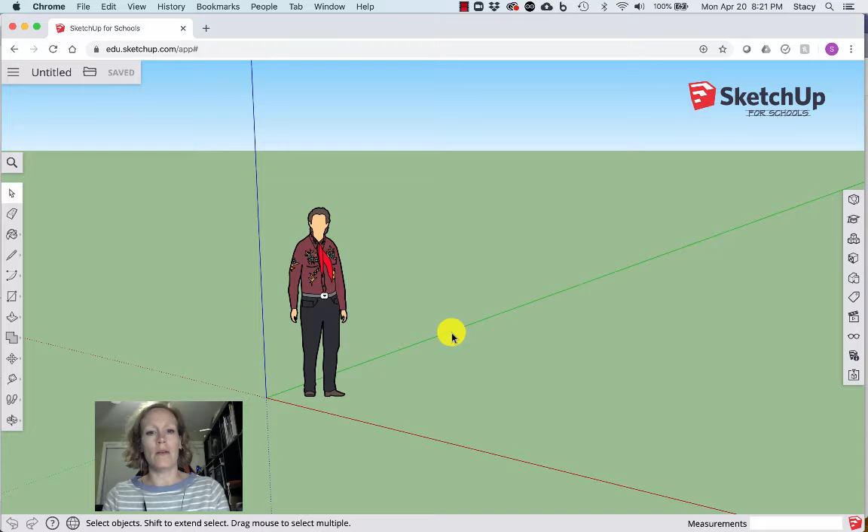She's over here just for scale, so you can see the scale of the things that you draw next to a person, but we're going to draw some things that are tiny, so I'm going to go ahead and select her and delete her. The next thing that I would like to do is save my work so that I don't lose things. So I'm actually going to name this model. We're going to call it example arm.

And it's going to ask me where on my Google Drive I want to save it. So I'm going to stick it in the SketchUp folder, and we'll put it in the tutorial, because that's what this is. Those are folders that I've already created. Unfortunately it will not let you create folders on your Google Drive, so you'll need to go into your Google Drive or your Microsoft OneDrive and create folders that you would like to house your SketchUp projects in, and then you can come back into SketchUp and save them. So now I have my arm saved. It tells me that right up there, and I'm ready to start drawing.

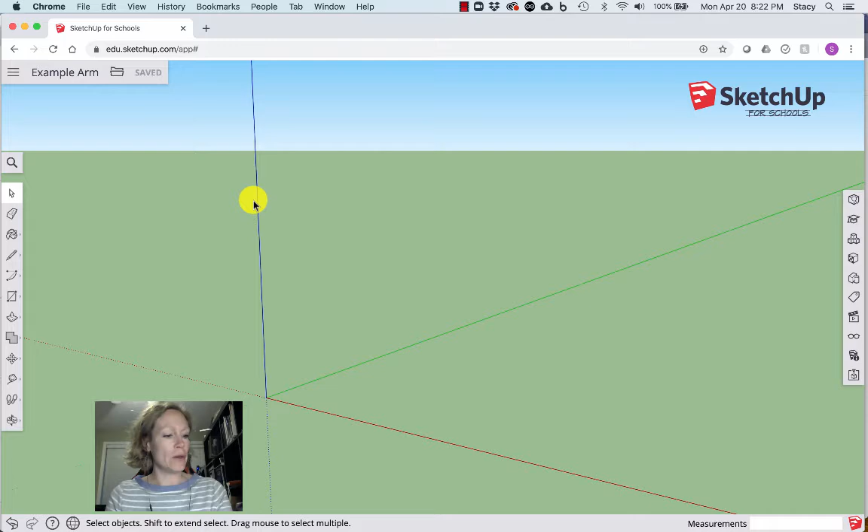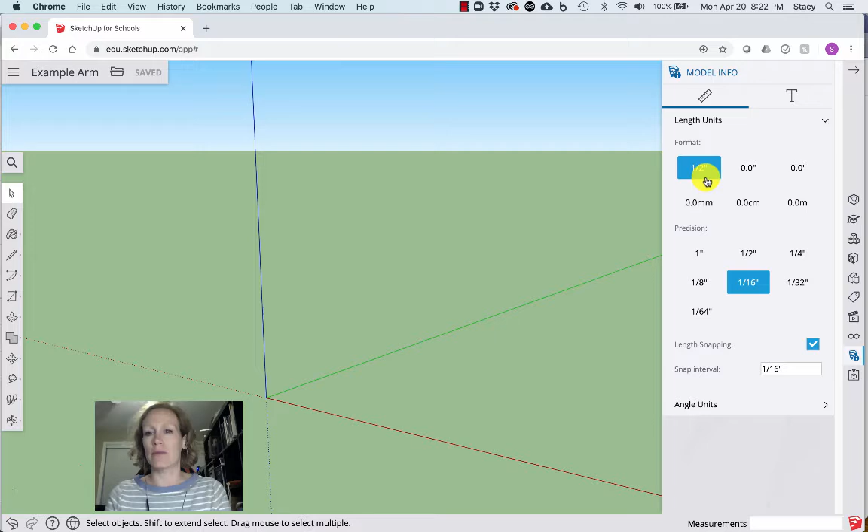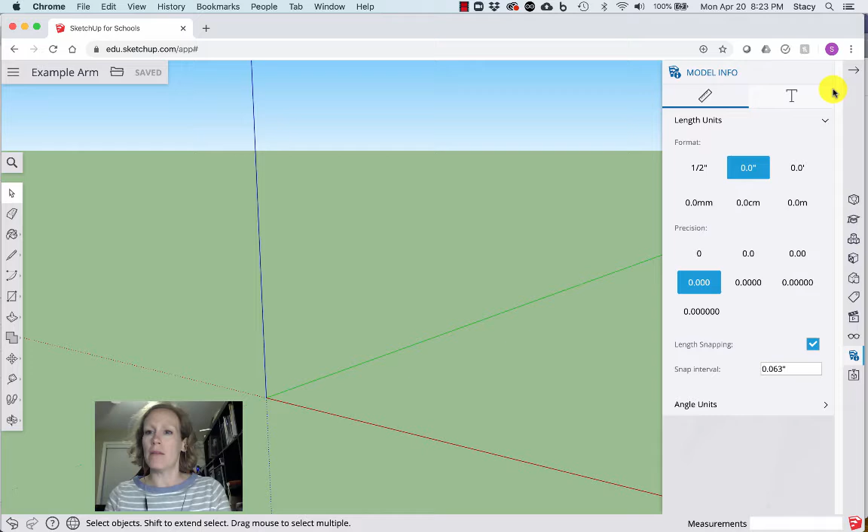So the first thing that I'm going to do is, I've already deleted my figure, so I'm now going to go over here, and I would like to set the properties for my drawing and how it's going to measure things. Rather than in fractions of inches, I'd like it to be in decimals of inches, and we're good with about 1/1000th of an inch precision. That should be just fine for our practices. So that's what I'm going to select. This is the model info button, and it gives you information about your model. And now we're ready to go ahead and draw.

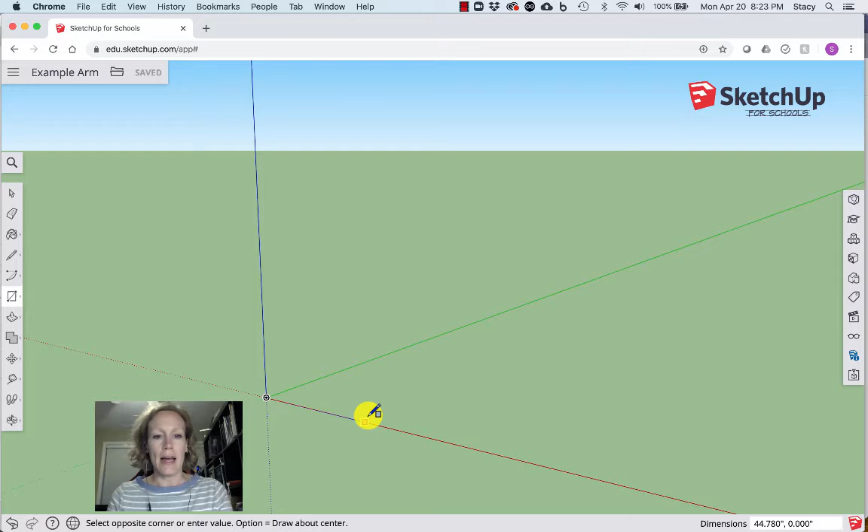So I'm going to start by drawing a 2D rectangle. So I'm going to go over here on my left side of the screen and choose the rectangle tool, and it's already selected, but it brings up this pop-out menu, and you can select from all kinds of different shapes. We're gonna use the rectangle and the polygon tool for this tutorial. So start with a rectangle, and I want to start my rectangle at the origin. I'll click once to place the first corner at the origin, and we're going to draw our shape on this flat axis right here, and we're going to give it some length and some depth.

And before you click again, you're going to start typing the length that you would like it. So we're going to make this 16 inches by 0.75 inches deep. So 16 inches long by 0.75 inches deep, and you can see down in the right hand corner, that's where the dimensions got typed out. So now that I've typed that in, I hit return, and it has just drawn that to those specifications.

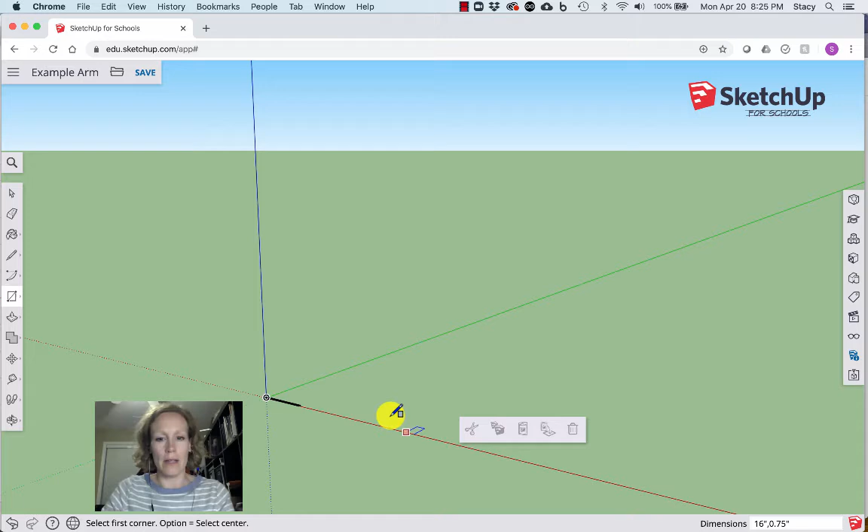So this is where it really helps for you to have a mouse with a scroll wheel in the middle for moving around in this environment. I'm actually going to click on this button right here, which tells me how I can move. I can either rotate, pan, zoom. I can zoom to a selection, or I can zoom extents. I'm going to do zoom extents, which is actually a little close in.

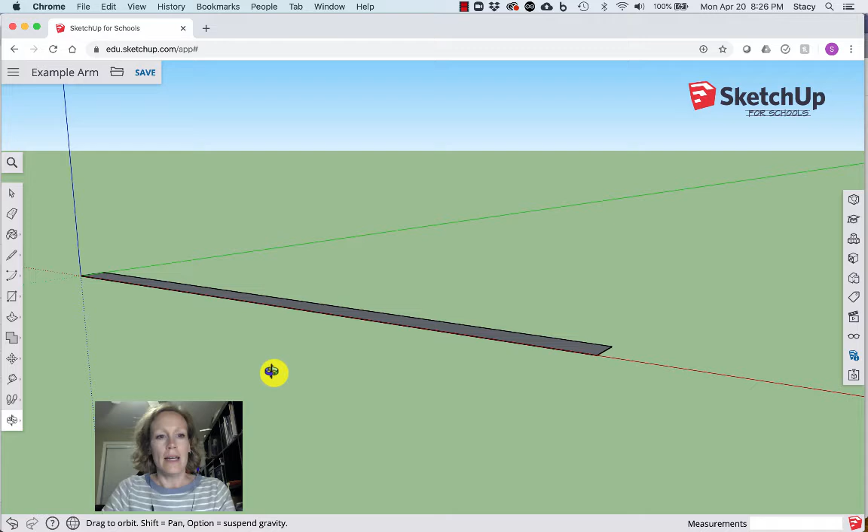So I'll use my roller bar to zoom out again, and now I'm in where I can see, and now I can use this rotate to take a look a little bit more at the top of what I've just drawn. So there's my rectangle, and now I'm going to give this part some height, and to do so we use the push-pull tool, which is over here.

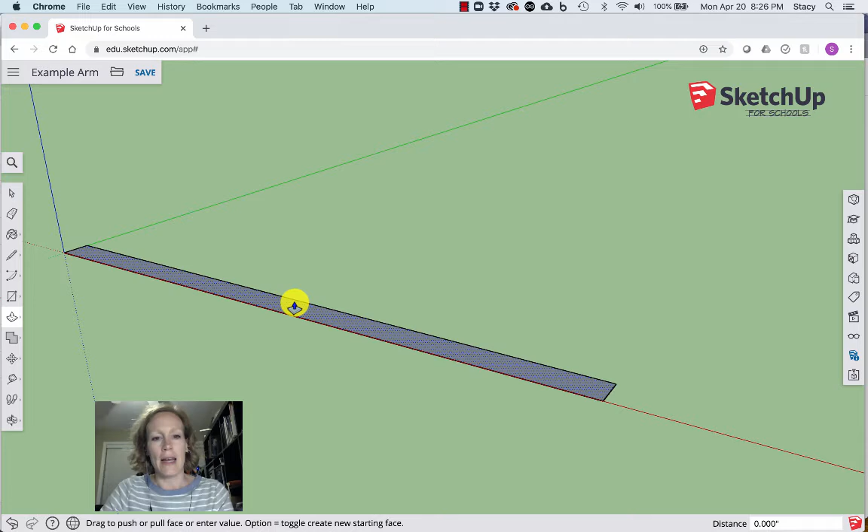I'm going to do push-pull, and I'm going to hover over this rectangle that I've just drawn and click on it, and I can pull up or I can push down, depending on how I want to draw my part. I want to pull up, and before I click again, I could just click and it'll give whatever distance that I've pulled it, but I want the exact distance, and so I'm going to type a distance of 1.5 inches and hit enter, and now it has drawn it to that correct height.

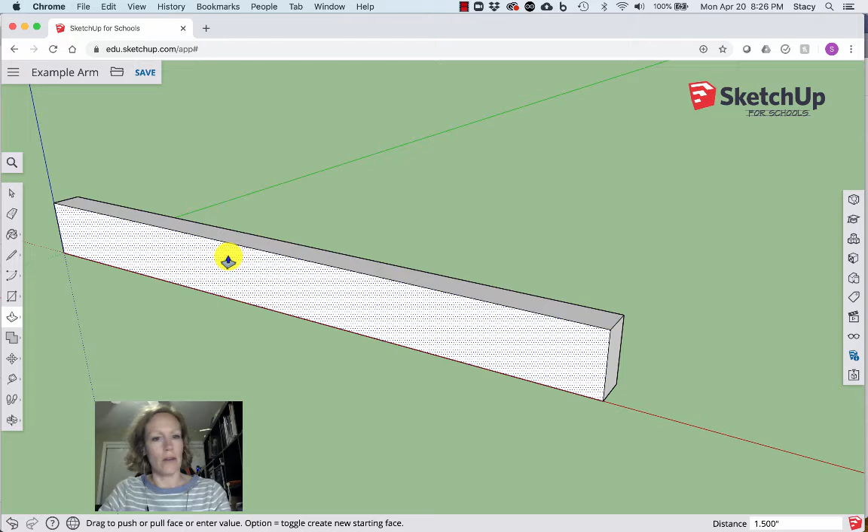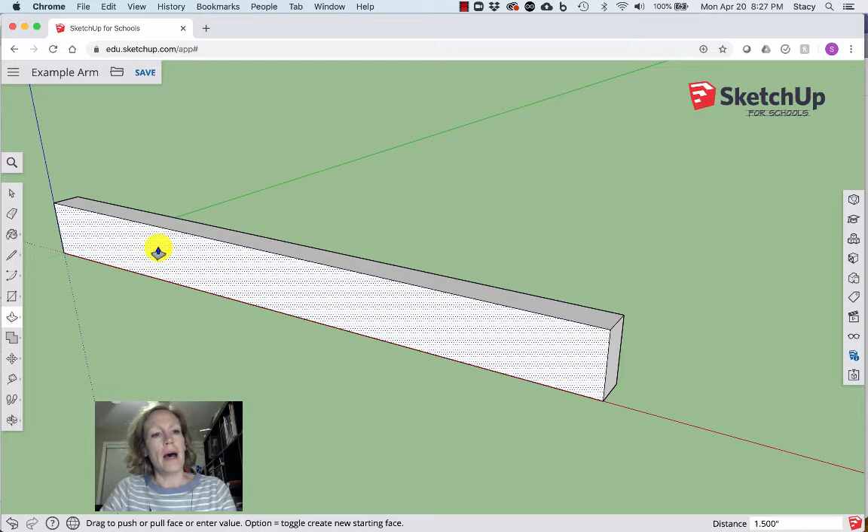So now I have this nice big block, and I'd like to draw some things on the block in order to be able to cut shapes into the block. So if I want to cut away, I can just go ahead and draw them anywhere and cut, but I want to make sure that I've placed things very precisely so that we have everything in the right measurements. So to do that, we have to create some measurement lines, some construction lines.

So we'll use this tape measure tool, and I'm actually going to rotate things a little bit and zoom out, and actually I want to pan, move over so I can see what's going on with my part. So go back in to our tape measure, and oops, I accidentally clicked. Just hit escape if you accidentally click something, and it'll take you back and undo what you just did, unless you've drawn something. So what I want to do is create a construction line that's 1/2 inch away from this left side.

So I'm going to click on the midpoint. If I hover over, you can see if I'm hovering over the edge, it tells me it's on the edge, but the cursor is a red square, and as soon as I get near the midpoint, it'll snap to it, and the cursor turns this sort of bluish circle or cyan circle. So if I click once there and I start to move my mouse over, I can again type in the exact measurement. So I'm going to do 0.5 inches and hit enter, and it creates the line at 1/2 inch right there.

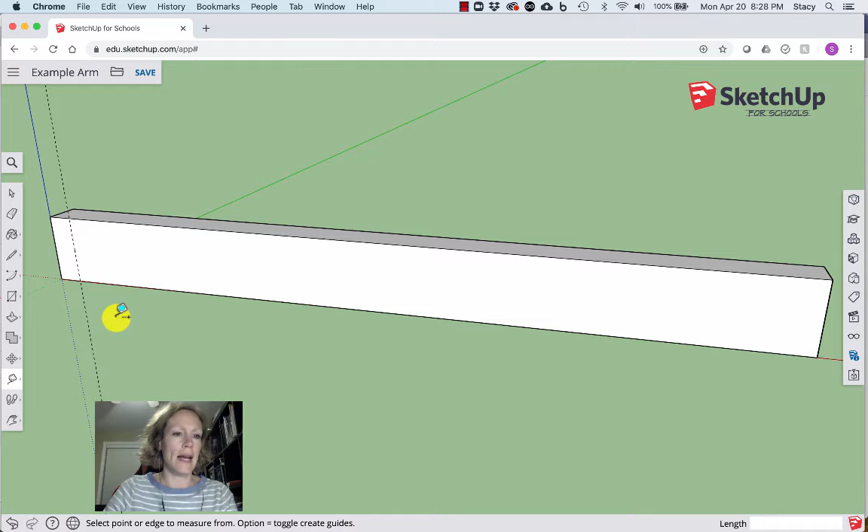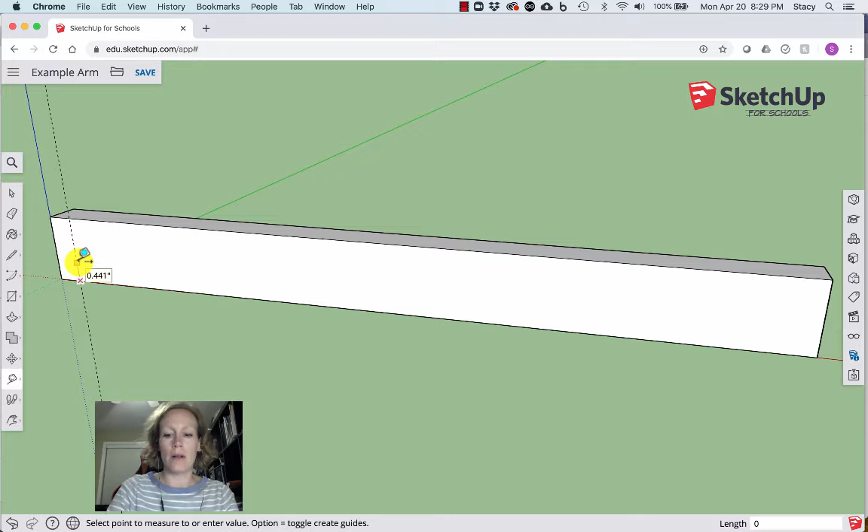So I'm going to create another line so that I can have an intersection, because I want to draw a rectangle with its first point at a specific location. So I'm going to determine the guide point where I want that first corner to start. So to do a guide point, I'm going to go again on this lower edge, and when I get to the intersection between the construction line and the edge, my cursor changes again. I click once and start to draw up along the line, and again I want this 1/2 inch from the bottom, so I'll type in 0.5 and hit enter, and now I've created a guide point.

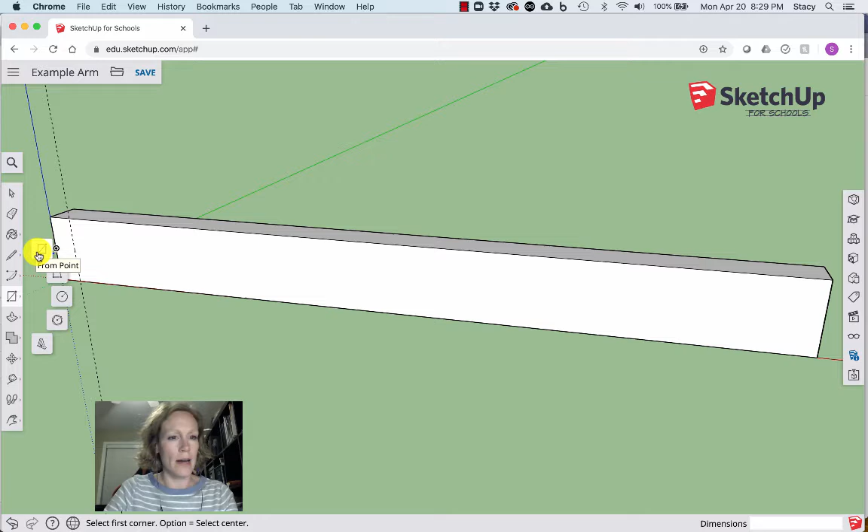So you can see the little point right there, and when I hover over it, it tells me it's a guide point. So these lines are just for construction only. They won't get printed in a 3D part, so they're kind of nice. So now I can go ahead and place another rectangle, which is what I want to draw now, exactly at that guide point. So I'll start by clicking my rectangle tool, and I can hover over and it'll snap to that guide point.

So I click once and I draw my rectangle up and over, and it's sort of disappearing on me a little bit, but there you can see that I have this rectangle on the face, and to give it exact dimensions, I type in its length first. So I'm going to make it 5 inches long, so 5 by 0.5 high, and hit enter, and now it's drawn this rectangle.

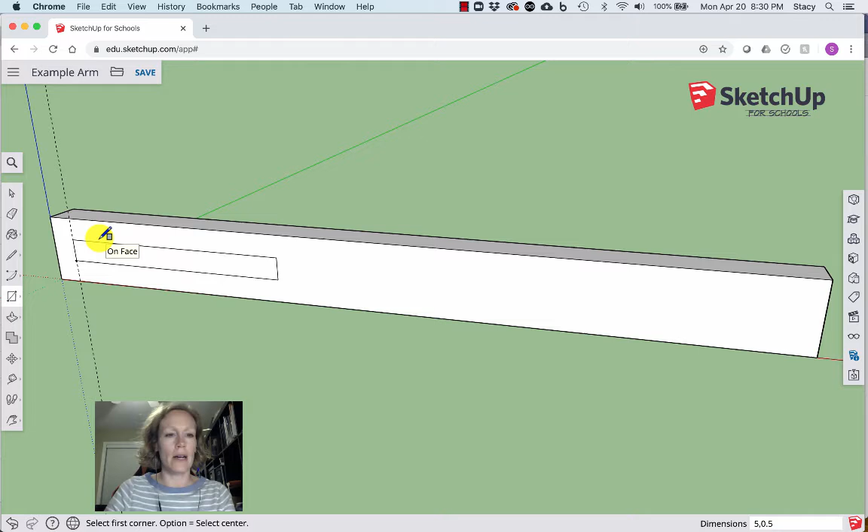So now I'd like to draw another shape. I'm going to draw a hexagonal shape, and this is going to be, for when we do our trebuchet, the bearing for a trebuchet. So what I want to do is draw another exact placement. So I'll use my tape measure again and click on that.

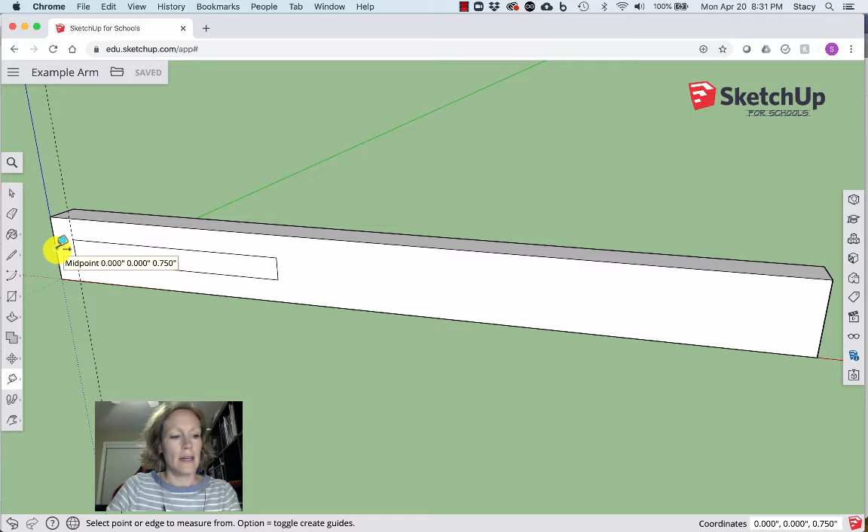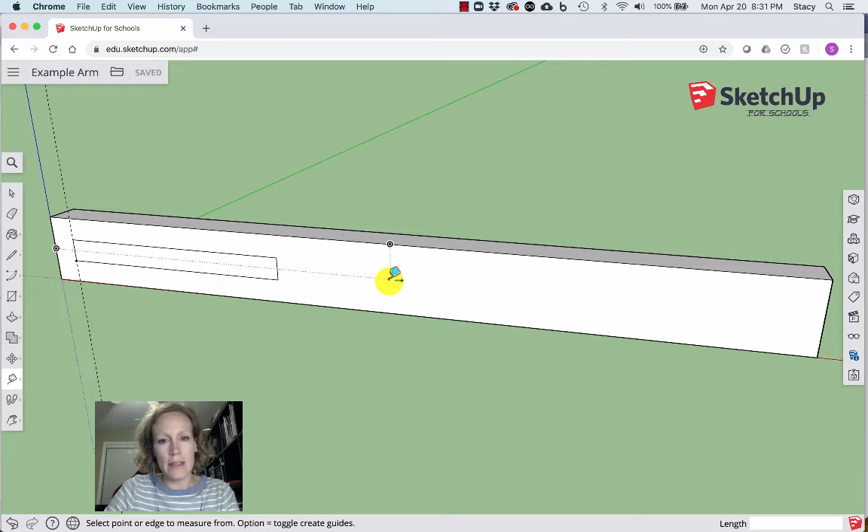And I'll again hover over the midpoint, and I can hover over that and kind of drag. And when you hover over, you can see that we have a red line once I'm on that midline, and it kind of remembers that. And if I wanted to, I could come up here and find the midpoint along this edge, and there's that midpoint. And now it's remembered where the midpoint was of both of the lines. So if I clicked right there, it would place this hexagon that I'm about to draw in the exact center of the side of this long brick that I've created.

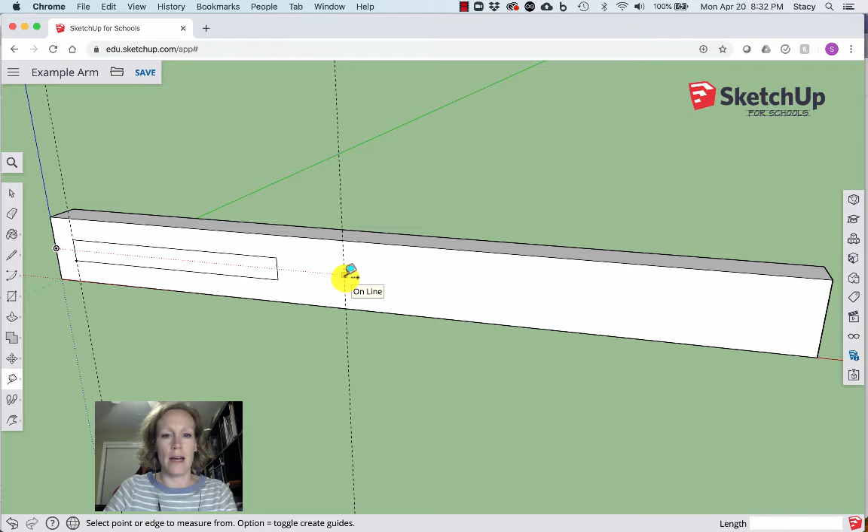But I actually want to place it in a different spot. I'm going to click this and drag out here, and I'm going to place it 7 inches away from that edge, and hit enter. And there we are. There's that line. And again, I want to place a guide point, and I want it to be equidistant from the top and the bottom. I want it to be exactly in the middle of this construction line on my block here.

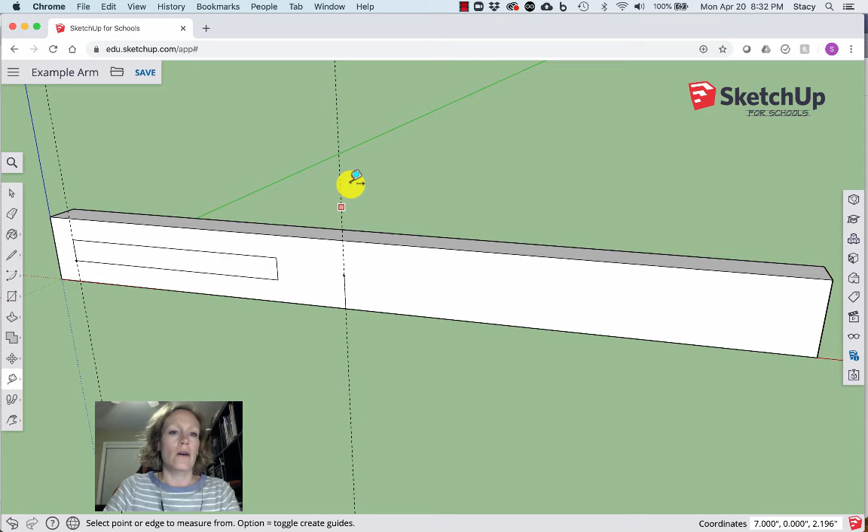So I'll click once on the intersection of the construction line, and once I get to that midpoint, it remembers where the midpoint was. It shows me that dotted line and connects it to the midpoint. So I can click there, and now I have a guide point at the midpoint. So now I'm going to draw a hexagon, and I go over to this shape tool, and I'm going to choose hexagon.

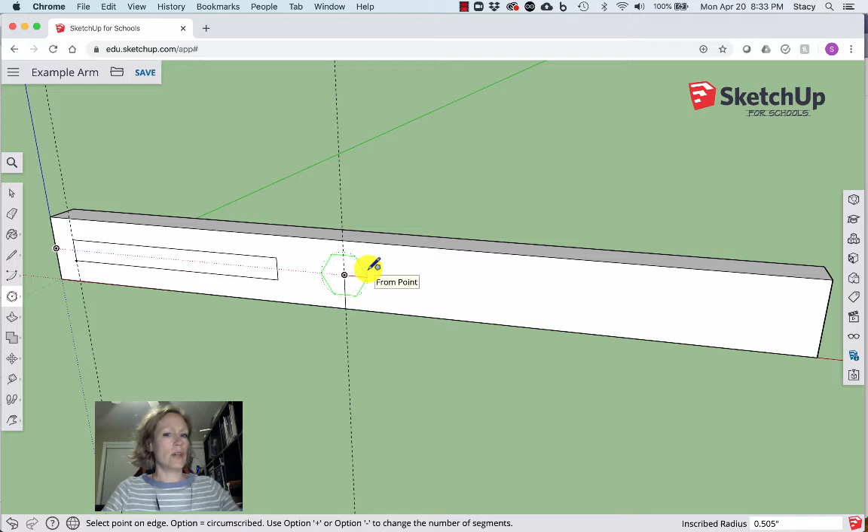So once I click that, I click once to place the center of the hexagon, and I start to drag away from the center point there. And as I do so, you can see that the measurement it's giving me is the radius of a circle that the polygon is inscribed in. So that means that the circle goes around the outside of the polygon.

I actually want to change that because the measurement that I want is from the center to the flat of this hexagon. And I can do that by pressing either the Option button if you're using a Mac, or the Control button if you're using a Windows machine. And if I change that, now I have a circumscribed polygon. That means that the polygon is around the circle, and the circle's on the inside of the polygon. So that's just a different way of dimensioning this polygon.

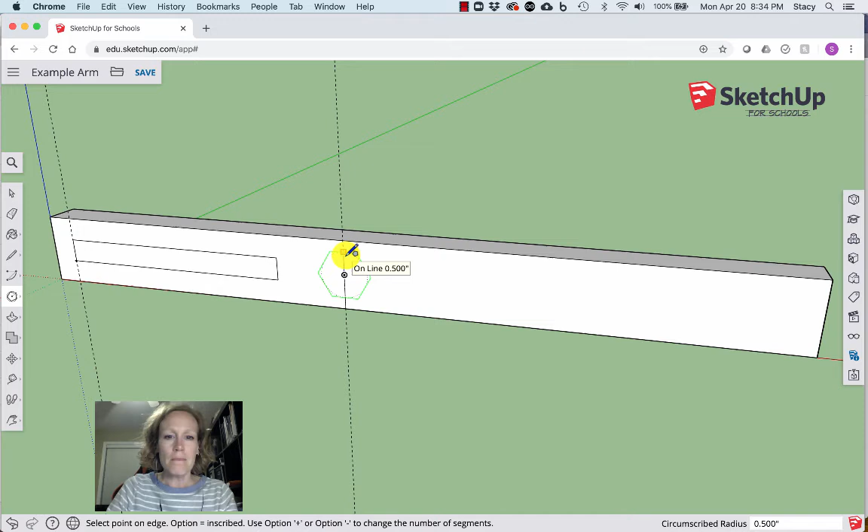And I'm actually going to rotate this around because I would like the flat surface to be on the top of my beam, just to give me some extra space between the edge of the beam and the point of this hexagon. So I want this to be a measurement of 1/2 inch, which it actually is, but just so that I have it exact, I'm going to type in 0.5 and hit enter, and now I have a hexagon. So I'll go ahead and hit my select, so I'm not drawing any more points.

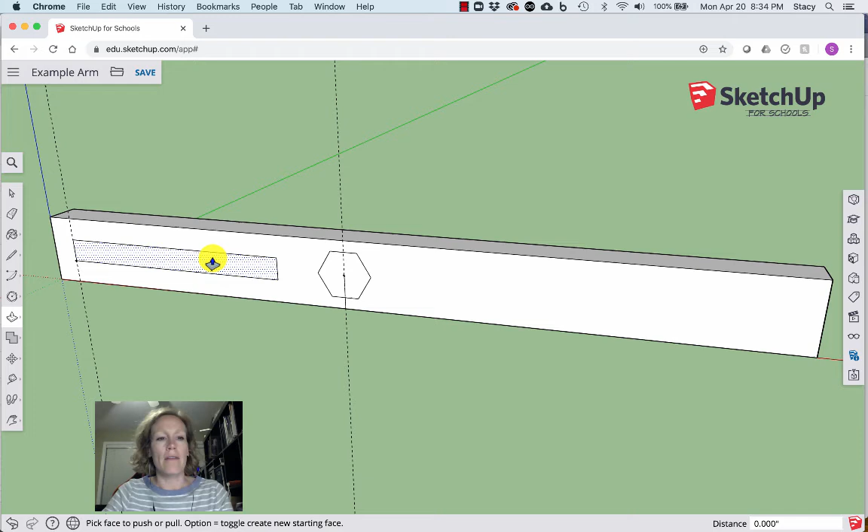And now I would like to cut holes where these shapes are that go all the way through my part. So to do that, I use the push-pull tool and click on that. And now as I hover over different parts, I can choose which surfaces I would like to push and pull. So I'm going to hover over first this rectangle that I've drawn, and I can pull it out this way and it will create more volume of a part,

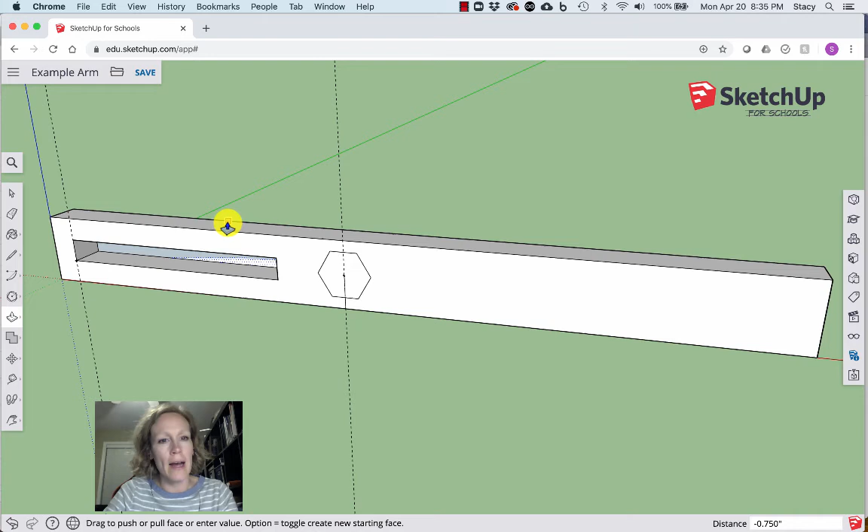or, so I clicked once to start pulling it, and now I'm going to push it back this way. It's kind of hard to see where the end of that is, but if I hover over that back edge, it'll tell me it's on edge, and when I click a second time, it draws a hole all the way through. And if I pan around, you can see through the part, which helps you know that you've drawn all the way through and not extended that shape out the other side.

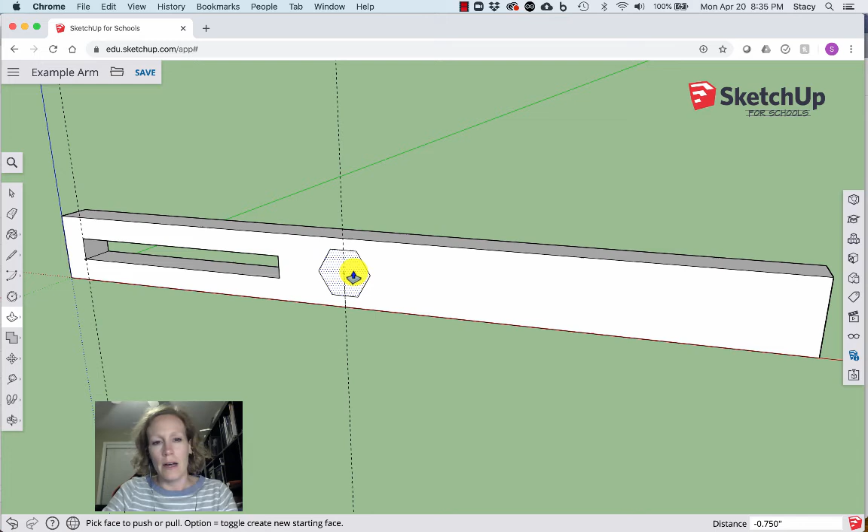So I can do the same thing with this hexagon that I've drawn. I can either pull it this way or I can push it all the way that way, and I don't want to do that.

I want to go on to the edge and click there, and then it goes and cuts the hole through my part. So now I have a part with a couple of holes in it, and I might be ready to make this into a real 3D part by sending it to a 3D printer. So to do that, we have to do a couple of steps.

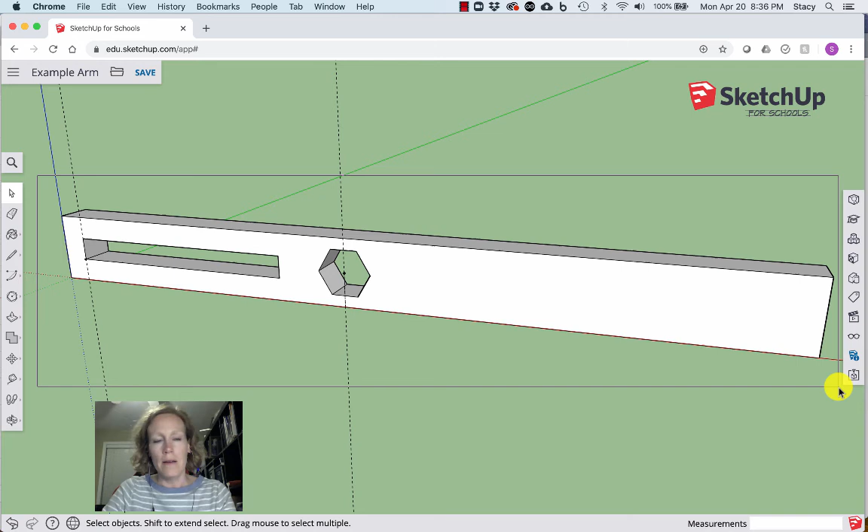First, we have to select the entire part. So if we click the select tool, now we can draw a box that covers the whole part. Just click and drag until that select encircles your entire part, and you'll know that all the things that are selected have blue edges and blue shaded surfaces. That'll tell you what part of your part is selected. If your whole part isn't blue, outlined and shaded, then you're missing some of it. You need to select the whole thing.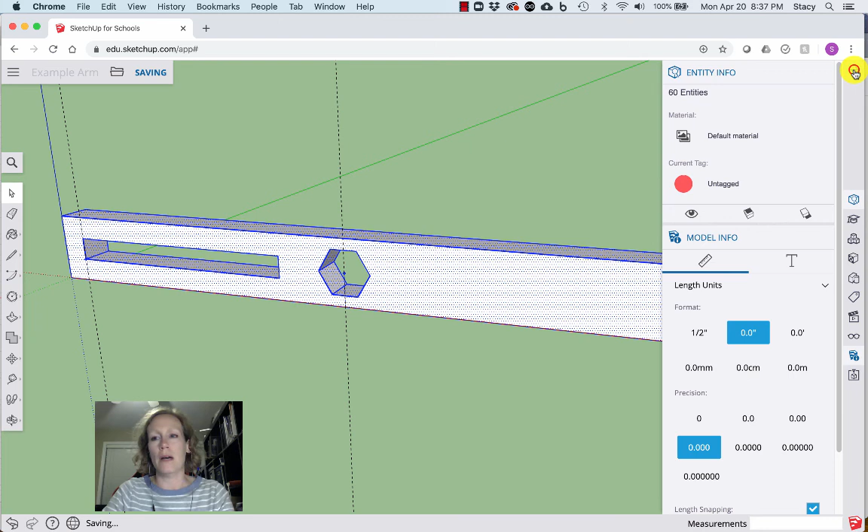So go over here on the right hand side to your entity info. Actually, before we do that, we can see it's 60 entities that I've drawn, but I want to have this be a whole group. So if I right click on my part after I've selected it, I'm going to say make group, and now it has turned that into a solid group. I can also check that it's done that correctly over here, and now it tells me in my entity info that it is a solid group. That's what I want in order to be able to do 3D printing. It has to be a solid group.

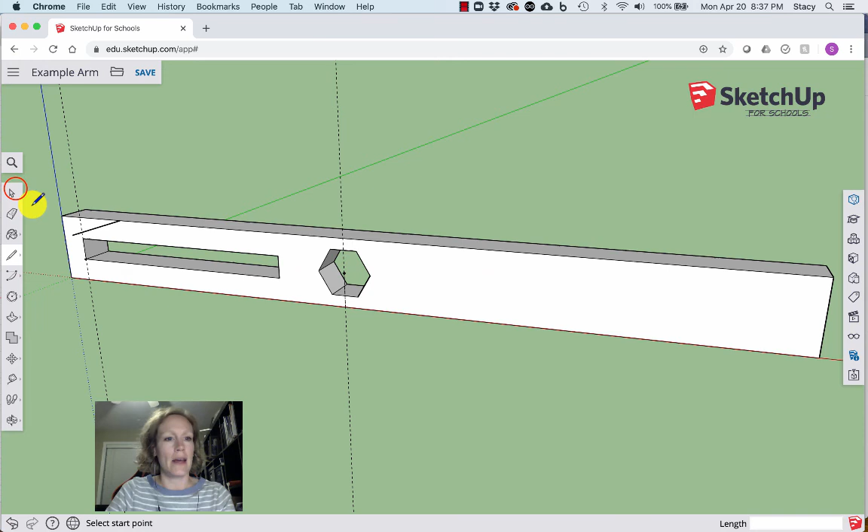I'm going to hit undo here. If I've done something like drawn a line that's off in space somewhere over here, and then I go ahead and select the whole thing again and say make group, and then I go over here to my entity info, it just says it's a group. And that's a problem. That means it's not a solid, it's not ready to 3D print.

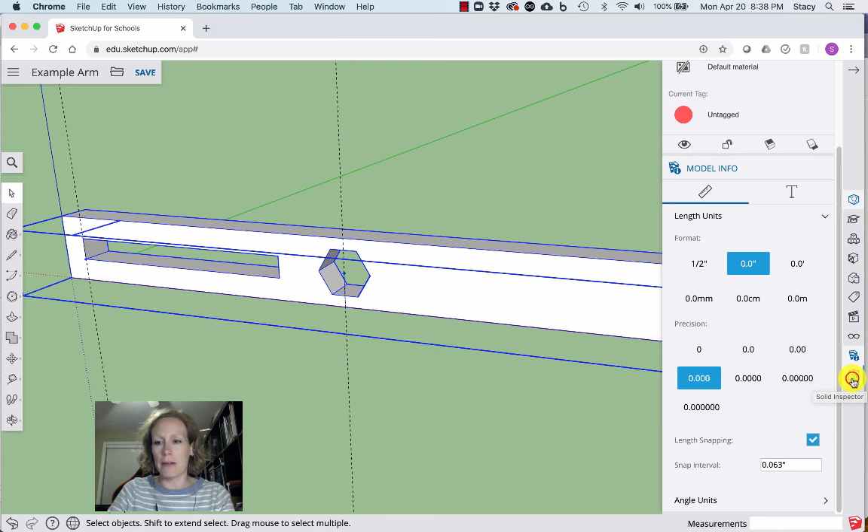If I want to, I can go down here into my solid inspector, and if I click on that, it says I've got a stray edge, and it will help me fix this error. So if I click fix error, then it's deleted that stray edge, and now, good news, we have a solid model. If I scroll up here, there we go. Click on that again for it to refresh. Now it tells me it's a solid group, and I'm good to go.

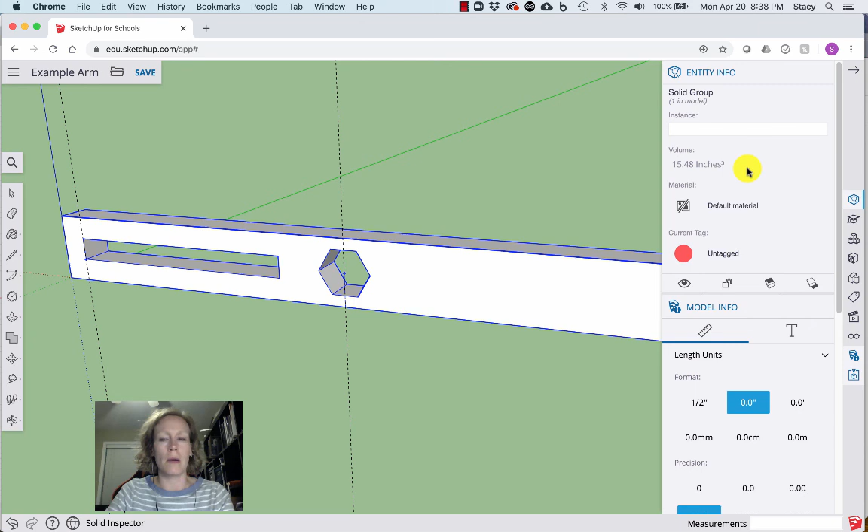Here also is where you can see how much volume you have. That'll be important for your 3D printing. This is a large volume. We've got almost 15 and a half cubic inches of material that we'd use up if we were to 3D print this part as it's drawn now. You may not want it to be that volume, so if you wanted less volume, you'd need to cut that down and decrease the volume.

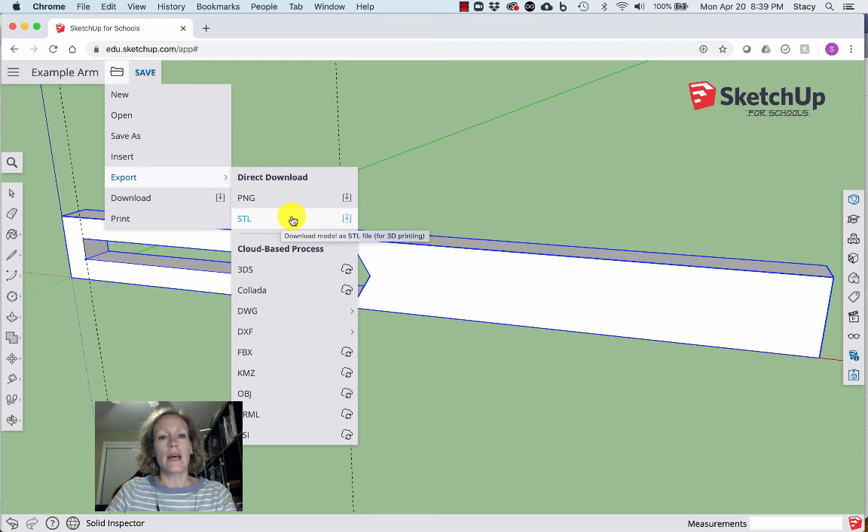But if it looks good and you're ready to print the part, you can come up here to the little file folder, and we're going to export, export STL. What this will do is download an STL file, which can then be sent to a 3D printer and printed. And this is what you would submit. It should download that, and then you should choose where to save it on your local computer.

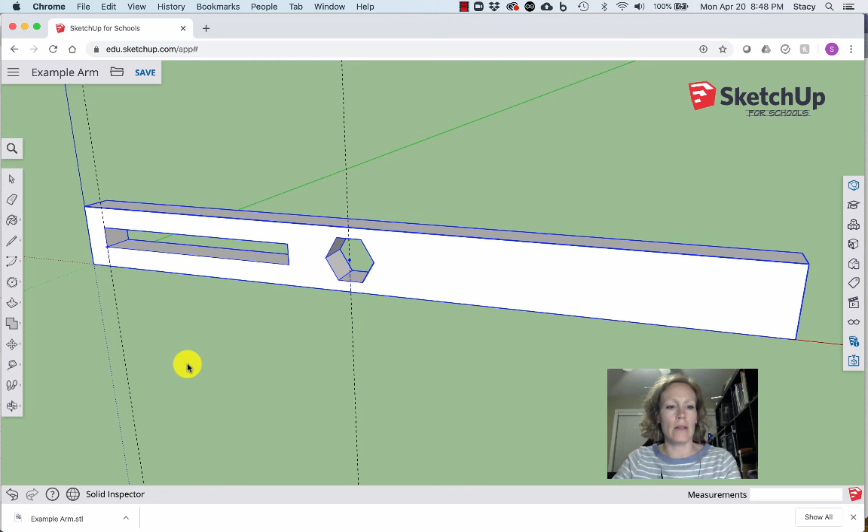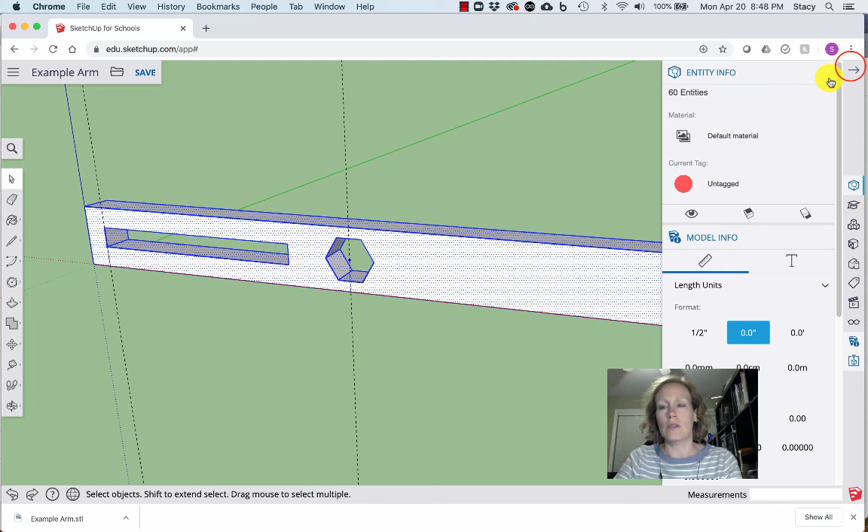One more thing to mention is that once you've created a solid part by grouping this, you can no longer make cuts into this part. You can still draw things on it, you just can't cut into it. So if you want to still make modifications, push and pull it, or make cuts into it, you need to undo that group command. So I undo that, and if I go ahead and select all of this stuff, it's back to just entities, which is what I want to be able to continue to draw and make modifications. We can't make modifications once it's a solid group.

End of this tutorial. There's lots more that you can do in SketchUp to shape this in a different shape, but this gives you an introduction to how you draw a 3D part.